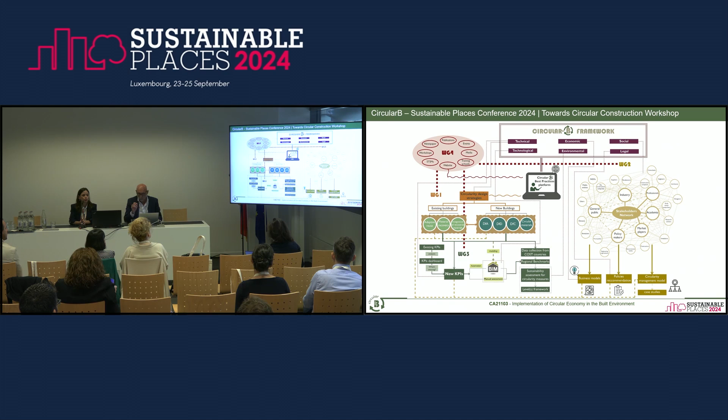And we are structured in 4 working groups: working group 1 about circular strategy and best practice, working group 2 circular value chain and stakeholder engagement, working group 3 on the KPIs framework, and working group 4 dissemination and results communication. So this is our big picture, let's say, how we are structured to have this circular framework.

And now I will tell you what we've been researching about the state-of-the-art on digital tools for circular economy. So it will be more about the concepts of digitalization and how this can drive this process to the circular transition, to the sustainable transition.

So first, what is the main concept about digitalization? I think there is not one only concept, but we can think about the emerging and often interconnected digital technologies that will enable more efficient processes and enhance traditional and new goods and services, products, and business models. So here we can have this broad vision about digitalization.

Also, the digitalization has been driven by these two technological trends, that is digitization and interconnection.

And it's part of the European plan or European future vision because the digital transition can open new opportunities for new business, for trustworthy technology, foster and open a democratic society, enable a vibrant and sustainable economy, fight climate change, and sustainable transition. And we identified the key requirements for these three transitions, towards a green and digital future. We can divide this into 5 main areas: social, technological, environmental, economic, and political.

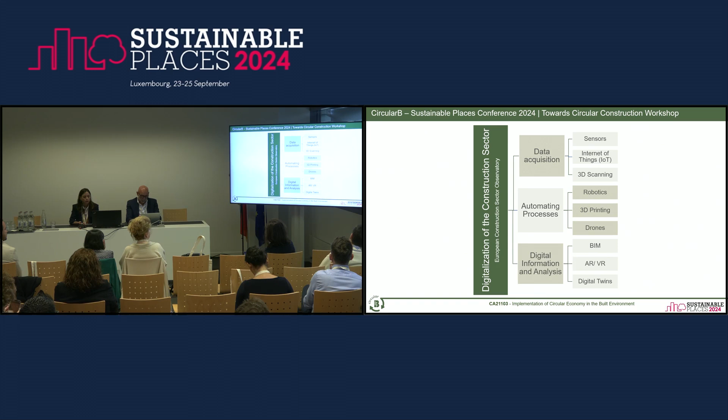They have also been adopted at different levels, or 3 levels of adoption and forms of implementation. The first, the basic one, is just to facilitate communication and reduce travel, like using WhatsApp or video conference. The second is more improvement and automation of the manufacturing process. And the third is the high level of usage of digital tools, such as drones for 3D scanning, 3D printing of prototypes, and testing a solution in the digital environment.

Also, we found that digital technologies have emerged as vital enablers in closing, slowing, and narrowing the materials loop. So they can help this dual transition to sustainability and circularity by analyzing, testing, and making informed decisions.

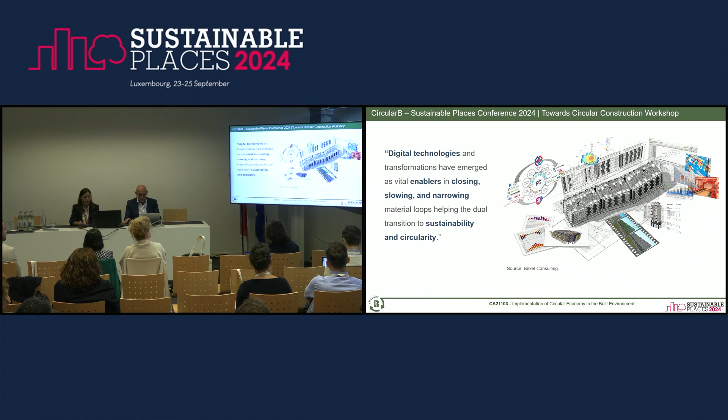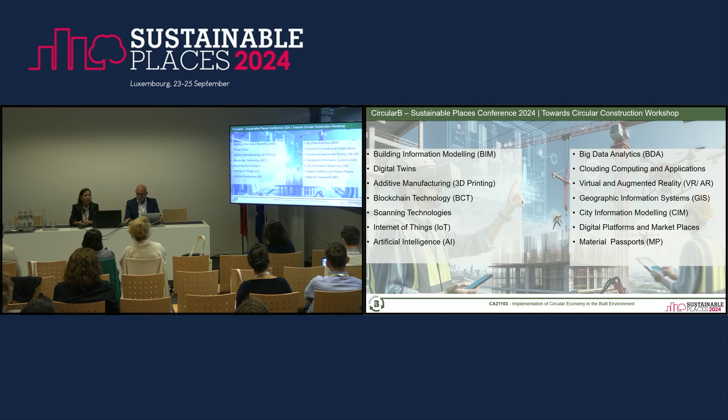We identified 14 main digital technologies that can be used to implement circular economy, or that are the most used to implement circular economy. I'm not going into detail on all the technologies here, but this is just what we found in our research.

Also, there are many benefits identified in the use of digital tools or digitalization in promoting circular economy. We can list some environmental benefits, such as easy access to product and material information through materials passports. I can analyze and test a solution and make decisions using life cycle analysis. I can also have more effective construction and demolition waste management.

Also, under the social benefits, we identified that the use of digital tools can accelerate economic and social progress, making more inclusive and livable places, cities, and neighborhoods. Also, safety and comfort measures, and we can use it to reduce costs and have more affordable houses, a theme that we discussed yesterday.

Also, through the economic benefits, we can use life cycle cost analysis. We can test and evaluate solutions before implementing them. And also, we have opportunities for new business models and circular business models.

Are we okay on the time? Yes? 2 more minutes. Okay.

And last, we have managerial benefits. We can facilitate this interaction. The use of digital technologies or digital tools builds trust in management and also collaboration. So we can also use data management and monitoring of material flows.

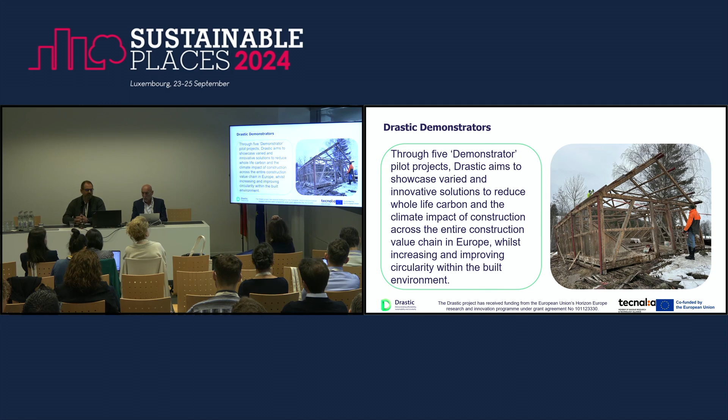We'll not go very deep on that, but at the end, we have different approaches to the same problem. One of the main objectives is to really develop a new understanding of how, for instance, environmental performance is measured. So we are developing a multi-life cycle assessment platform or methodology where we could actually evaluate how the impact of a product that is reused several times during its lifetime can be measured. That's one of the objectives.

And the other one, of course, because we are talking in the era of digitalization, we need to keep track of things, and we need to implement a digital traceability platform. The main objectives for this platform is really to integrate these novel data-driven tools. Some of them are just existing, but some of them are not.

We are making a lot of emphasis on the way we are diagnosing these products. What is the health of the products we are going to reuse? That is some information that has to be kept tracked.

We are working also at building level, for instance, developing tools on the fast diagnosis of thermal efficiency. We are also, for the construction and reclaiming materials, developing automatic identification by artificial intelligence. We have a concept on extended traceability I will show you later, on the involvement of the different actors in the supply chain for the reused materials.

Basically, what we want really to keep track of is the product that we are reclaiming. That's our starting point, and how that's integrated. For that, we have role players like Madaster or Kala to perform all these calculations.

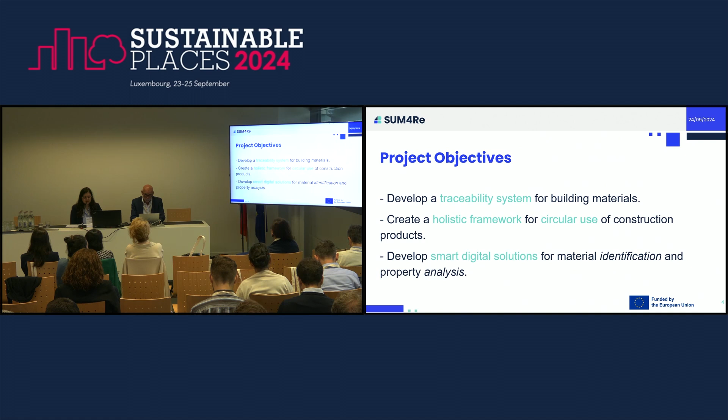Digital solutions and interfaces will be developed to ensure a connection between SUM4Re and platforms developed in previous existing EU projects. This includes software and databases powered by artificial intelligence and blockchain technology, to ensure everything is tracked efficiently.

Our tools will also focus on reducing waste and lowering CO2 emissions, and consider circular economy practices such as reduce, reuse, repair, recycle, and renovate.

Additionally, we'll improve existing tools, for example by enhancing the BIM standards to support the circular economy and make sure everything works well with other systems already in place.

SUM4Re will develop a new circular BIM, a CBIM, that will also be connected to different national construction material databases, including other digital material passports.

So to sum up, the objective of the project is combining urban mining and digital technologies for automated data acquisition and building materials identification. The project is funded by the European Union and includes 17 partners from 9 countries. It started in June 2024, so it's very recent, and it will last 42 months.

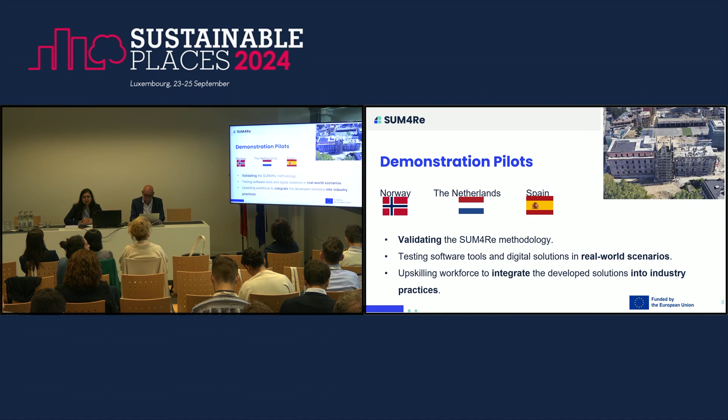In conclusion, SUM4Re aims to support the transition to a circular economy by pioneering new methods for material identification, circularity, and sustainable construction. My question is, because all of our projects will be working on very similar topics, how can we create synergies between them, and how can our projects work together, learn from each other, and perhaps you have ideas of collaborative activities that we could do together. So this is my very large, very vast question.

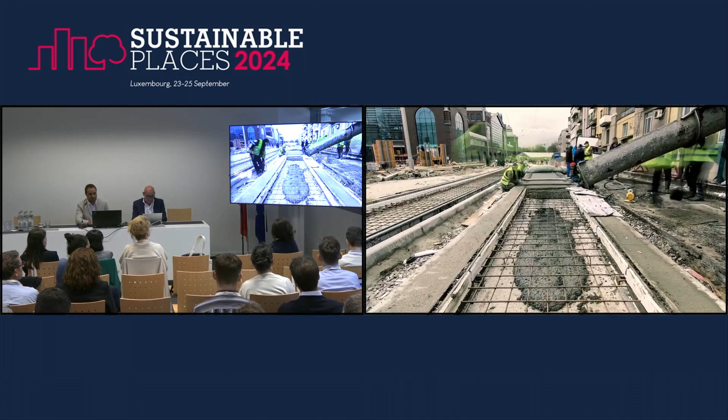These pioneering technologies will shape the future of road and rail networks in Europe. Welcome to a new era of transportation infrastructure, where sustainability and innovation converge for a brighter tomorrow. LIAISON: making transport infrastructure climate neutral, sustainable, and circular.

So as you can see, the project deals with a lot of different solutions, physical and digital. I will present two of the digital solutions that we are now developing. The project started a year ago, and now we are finishing some of the solutions.

The first one is a dynamic multi-infrastructure governance framework. The idea here is that we ask construction companies to adopt new solutions for improving sustainability in civil works. But we don't have a reference for what is sustainable and what is not. So the idea is to implement a complex and advanced methodology to assess the sustainability of the civil work, the transport infrastructure, compared with the business as usual, the standard approach. Here we assess the different dimensions of sustainability.

We assign different weights and scores to the different solutions, and we arrive at a multi-criteria analysis to weight and have a score and rank of the different solutions we are implementing. This is aimed at design companies, construction companies, and administrations, so that in the tendering process they have an overview of what is sustainable and what is not, in order to select the most sustainable works. And the other tool is a BIM-based tool for enhancing circular economy at the end of life of the project.

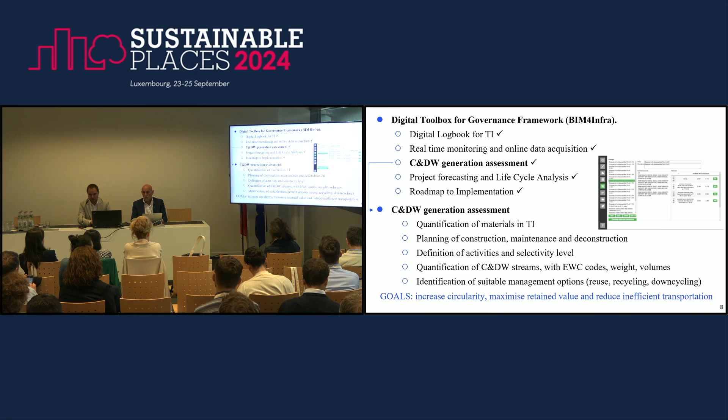We are able to plan the decommissioning and the valorization of the different waste. The idea is to implement a layer of traceability with blockchain technologies and other technologies, in order to track the materials from demolition to the valorization plant, and after that, the inclusion of the valorized waste in new products.

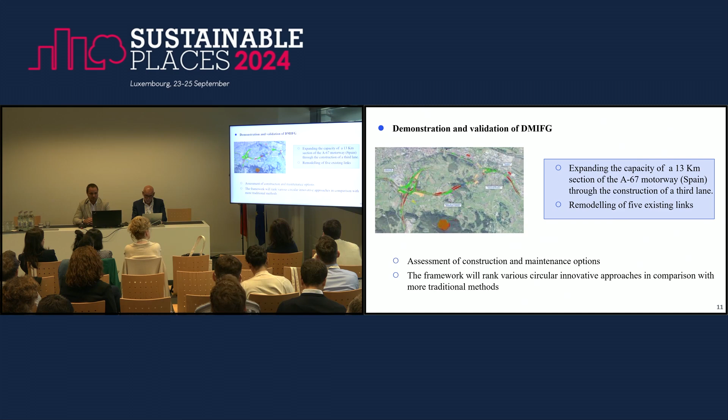Now we are finishing the different tools, and the idea is to demonstrate them in a real demonstration project. Here the idea is to assess different maintenance options during the expansion of a motorway in the north of Spain. We are helping the administration tender the maintenance works of this motorway.

And that's all from my side. Thank you so much.

I'd like to thank you twice for the presentation and a very nice movie. Sama, please continue.

Perfect. So, good morning, everyone. It's actually really nice to see that the room is full, and maybe I can do some dissemination on behalf of R2M, if I may. So I heard that this year they had the highest in-person registration, and I can see already that the room is full, so that's really nice. My name is Sama, I'm from Demo Consultants, sitting next to the director of the company.

And I'm happy that today I'm presenting the REINCARNATE project on behalf of the whole consortium, sharing with you some of the recent results that we have in the project.

I'm not going too much into details introducing the project, but just in a nutshell, reincarnation of the construction products and materials to extend their lifetime and basically bring them back to life is the concept of the project, and hence, in short, we call it REINCARNATE.

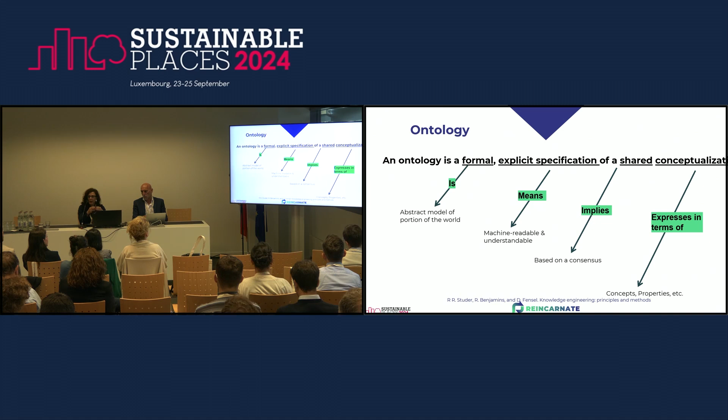What is the ontology for circular economy? What does it mean? Basically, the ontology is a formal, explicit specification of a shared conceptualization. So in a nutshell, there are terms, there are concepts, but it's not very clear between different stakeholders, and the whole purpose is to define that and define explicit connections between them and the relations between them.

So what we did in this project at the beginning, we tried to identify the key notions. How did we do that? We came up with structured templates, we did workshops, and we are now in the process of writing a paper about this, because then we can propose that as a generic and general methodology, so it can be implemented in other projects. But what we tried was that we had a diversity of different stakeholders in the project. So through these templates, we try to understand what is the key notion. For example, as a contractor, I find this important because I want to achieve this, to create this and that.

Once we did that, interestingly enough, we found out that there are some common entities, some common concepts within all these descriptions that we found from the different stakeholders. So there are always actors involved. There is product component, there is energy, there is value, there is information and process. But so far I haven't described the relation between them. What we understood is that when we talk about circularity, it's basically a process in which different actors are trying to create value. And that value could be economic, could be social, right? So that's something you can also define under value.

As you can see here, you define the relations between different concepts. So a process involves actors, and then a process has properties - it has cost, it has environmental impact, it gets an input, maybe it's a product, or maybe a component, and then it creates another product, right?

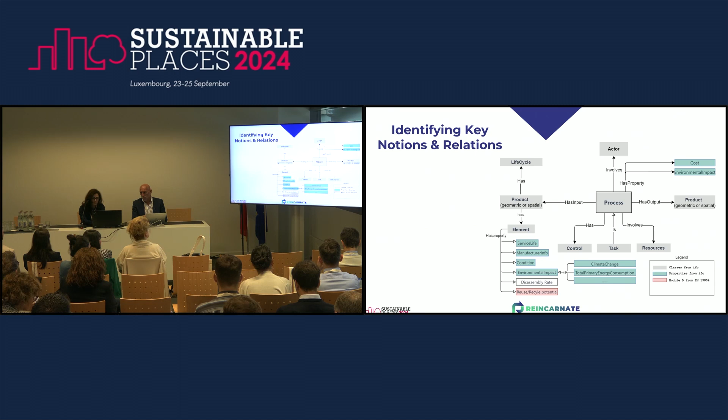And the product has a life cycle, the product has elements, et cetera. So you can go deeper and deeper in this description. And as I said, I don't want to only talk about theories. I want to show how we did this in practice.

We have so far implemented this methodology for two use cases: upcycling flat glass, meaning you use flat glass in the next life cycle as flat glass again, which is more valuable than downcycling it to bottles, for example. The other use case is the digital delivery ticket. Since I had limited time, I only focus on one, but if you're interested I can explain the other one later.

So what we did, as one of the results of the workshop, we tried to understand the process: what are the steps involved, what are the different actors involved. In very abstract terms, you have a window in the facade, then it's dismantled, then it goes to the crushing center, then it's called cullet when crushed, then it goes to the optical sorter, and then flat glass is manufactured again and put back in the building. That's the big picture, and for each step we have process, actor, input, and output.

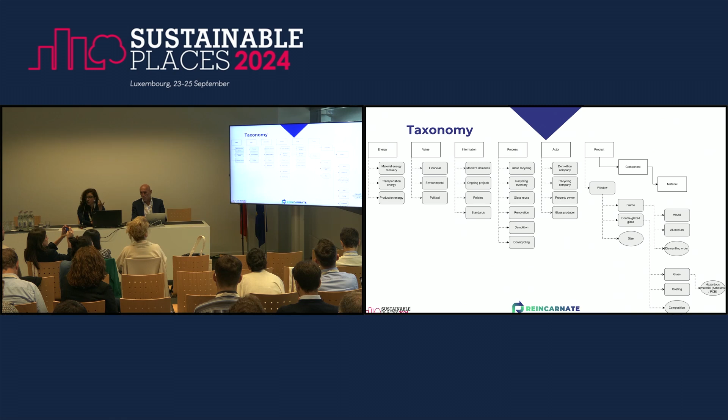Basically the data flow. Then we started to define the taxonomy based on the notions we identified earlier. For this specific use case: what are the processes, what information is required, what kind of value does it generate, what are the products, what does it get as input, and what does it produce as output?

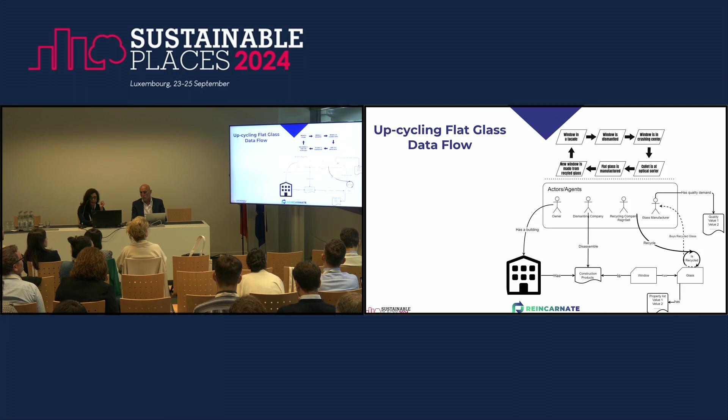Then we tried to go deeper into the actors and see how they relate to each other. We started to sketch that in the CPIM, the Circular Potential Information Model platform: who are the actors involved in this case, what do they need from the platform, what are the products, what are the processes I explained earlier, and what are the tasks?

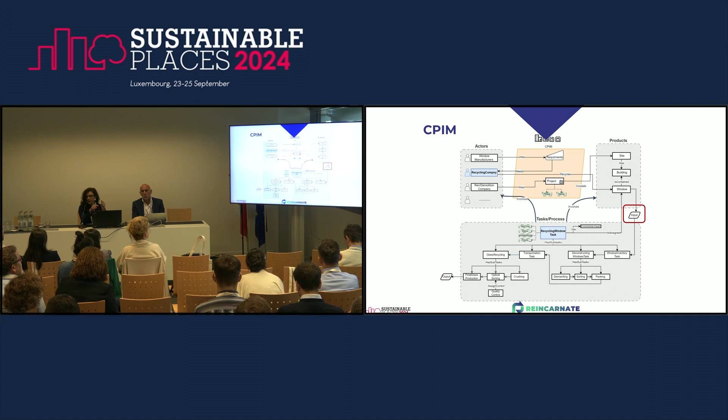When we drew this scheme together with experts in this field who are part of the project, we identified that getting input from the window is actually one of the bottlenecks. This is very important, because every process requires a different batch of that data.

So coming back to the ontology, we looked at existing ontologies and didn't want to reinvent the wheel. You all know IFC is already a very recognized data format, de facto the data format and data model used in the construction industry. We thought it was good to utilize that rather than invent something new, and if we recognize something is missing, we can propose it.

So this is an example where a building has elements, window being one of those elements, and window has different entities. This is how it's basically modeled in IFC.

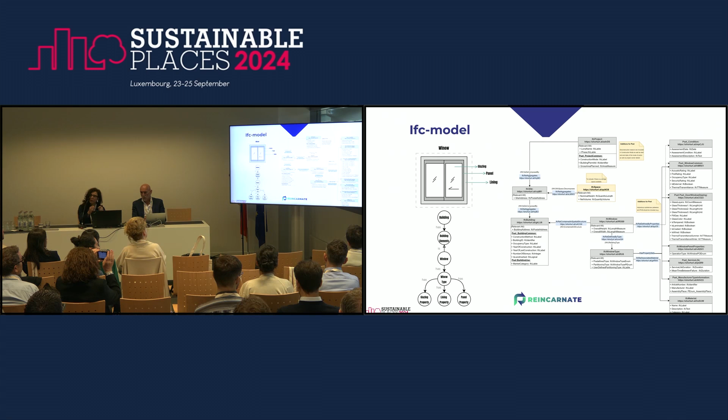So together with this expert, we went through all the common properties already identified in IFC, and they told us what's actually important for them, what they need. We highlighted all those parameters, and together with them, highlighted the missing parts. That's where we came up with suggestions and recommendations, which I think could be interesting for buildingSMART, since they could include it in the next round of development.

So for example, we propose three new properties here. We define the type, we define the data type, with a description of why they are important, and we also propose how they can be integrated.

Then going back to the scheme I showed earlier, I said we need ontology, but we also need logic, so we need rules of inference. Now we have this IFC file with data stored in it, so what do we do with it? We started to brainstorm with these experts and got insight into how they actually make their decision-making processes, and then we defined a few rules. A simple one: if there is wired glass, then it has to go to landfill.

If there is a film on the glass, and if the thickness is less than this, then it can go to recycling, and if it is laminated, it should go to downcycling. So basically, these are some decision-making processes that they have, and we have identified for each decision process what is the kind of data that they require.

So here it comes to the computation part, as I said, so how to implement it, how to make it machine-readable, and actually how to use it. What you see here is a screenshot from the CPIM platform, which is based on RE-Suite platform, which is our own product, developed in-house, and MainFlux product, which covers the IoT part.

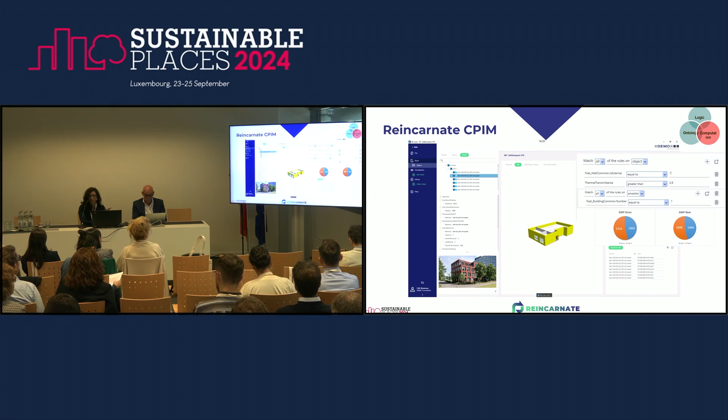And of course, you can also scale this up and imagine that then you can do it with several buildings. So basically you can quickly understand what is the total volume or square meter of the potentials that you have within this neighborhood, for example.

I think I'm almost reaching the end. So this is the end of the presentation, but as I said, we did the same process for digital delivery ticket, and that one is mainly about enriching the IFC file with this QR code that you can scan. What we have done is enrich the IFC file with the data that we get from the QR code. I'm happy to talk about it later on if you're interested.

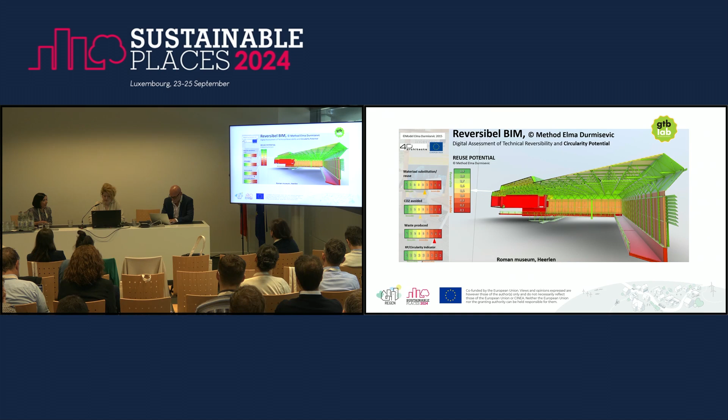Now, this reversible BIM is part of a bigger reversible building design toolkit, which has been validated during the Buildings as Material Banks project, a Horizon project, ended in 2019, where basically I developed a whole toolkit which was based on the project and my PhD from Delft, end of last century and beginning of this century, which was dealing with design for disassembly, and ended up in a number of European projects.

The Buildings as Material Banks project, a Horizon project, was one of the first ones where we tried to define the framework for circular buildings in Europe. This toolkit tried to understand better what a circular building would be, where we developed two key parameters for how to assess circularity of a building.

One is the technical reversibility of a building, that's the reuse potential of materials, what can we do with them, and the other is spatial reversibility of a building, which has to do with adaptive reuse, what kind of different aspects and functionalities buildings could have in order to reuse them again.

Together, there are design guidelines to support designers to design such buildings, but also assessment tools like reversible BIM and the transformation capacity. I will not be talking about that one.

Much of this is integrated in a number of ISO standards and things you've seen in the past, and circular economy principles published by the European Commission, where the principles that I will shortly be talking about, built into reversible BIM, are integrated at various levels and so forth.

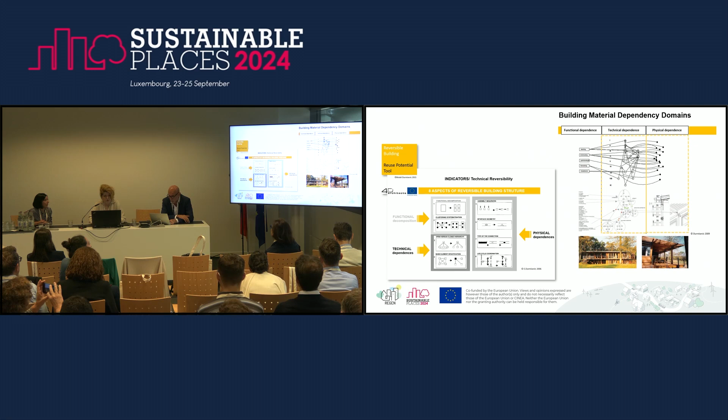The functional decomposition, just to go through some of them: the modularity of prefabrication level, whether there is a base element or intermediary between the parts or not, the hierarchical structure and hierarchy of the configuration, how easy it is to reach something through the assembly or disassembly process, the geometry of connection, the type of connection, life cycle coordination, just to name some of them. In the end, there are 8 indicators and 17 sub-indicators.

These tell us how easy we can take a material out of the building, what level of damage the material will sustain, and what the potential reuse option for that material would be.

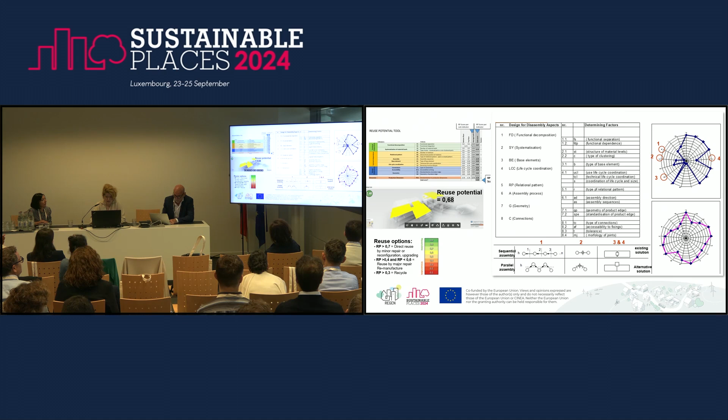The reuse potential then becomes a kind of number from 0.1 to 0.9, reflecting reuse options which are color-coded, as I showed in the first slide. These reuse options basically address...

The size of the feedback loop of the material when recovering it. The shorter the feedback loop, the better, or the lower the environmental impact there will be, and a lower economic impact too.

So what these loops represent here is all possible options of taking material back into, or making a new material out of, the existing one.

If we recycle concrete, then we go into a very big loop, going to this red part where we have to crush the concrete. That means there's a lot of transportation from the construction site to the facility where the recycling takes place. We have to create a new product and go through all production processes in order to create a new material. So that's a very big feedback loop.

A very short, green feedback loop would be if we took a frame out of the building, repaired it — say a steel beam, made some repair — and brought it back into the new construction. So that's a small, short feedback loop.

How we identify which feedback loop we are dealing with is based on the 8 indicators and 17 sub-indicators I was mentioning. Of course, all these indicators and sub-indicators are published many times, and I'm sure you can find them in articles or on the website.

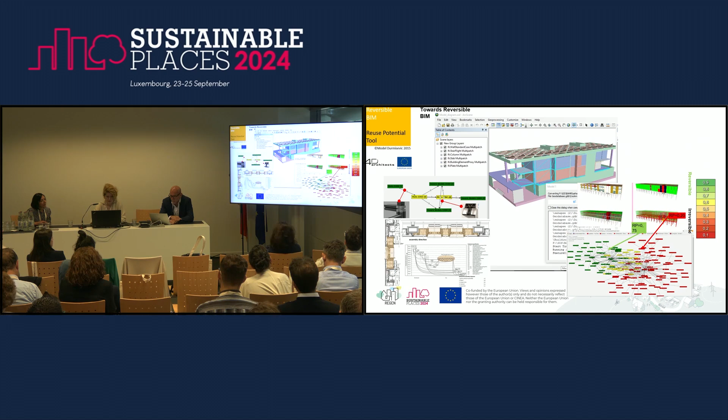Now I go to the pilot that we are working on in the region, and Anna is going to show what we've done further on with these data.

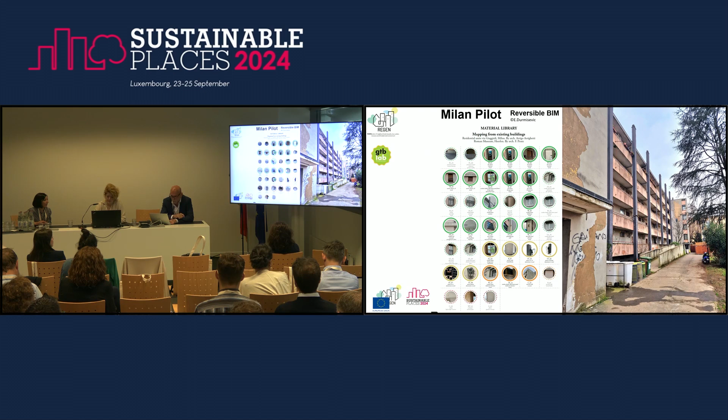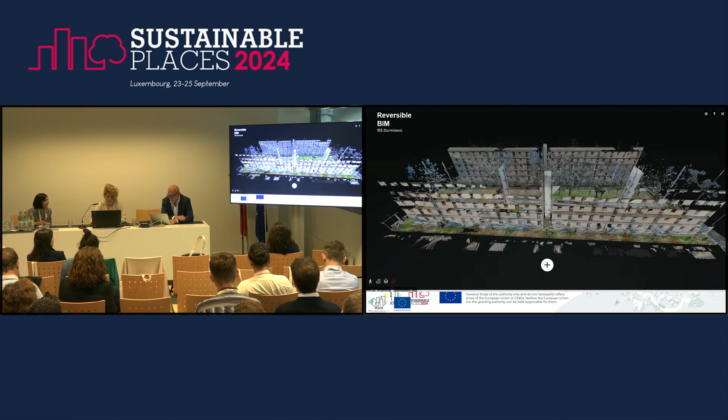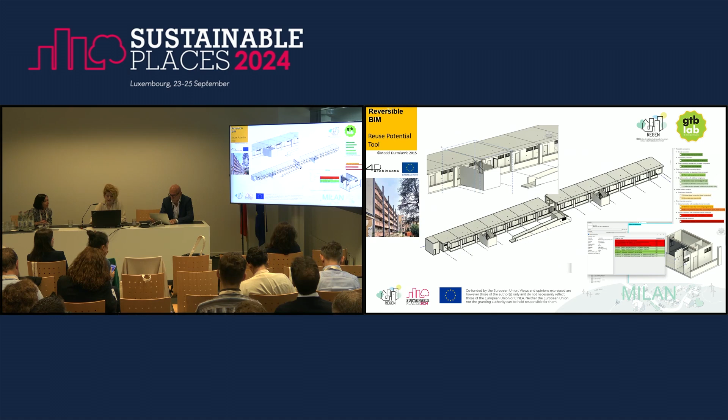So we have a neighborhood in Milan, a couple of housing blocks which need to be demolished. We've done first some manual analysis of the block itself. Then the scanning of the building has been done, the 3D scanning. And after that, and getting some technical information from the city of Milan, the BIM model has been built with the materials assigned, the connections between materials identified, and the analysis of all relations between materials in this model are automatically calculated.

This is an analysis of one apartment in this block, which has 124 elements, so many relations between the elements, and these 7 disassembly procedures.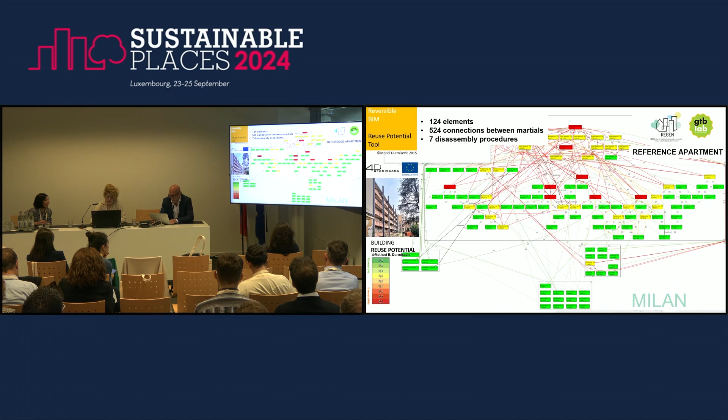This is very small, those are very small letters, I'm sure you can't read them, but this is just an overview of data that comes out of a BIM, telling us something about the function of material, the volume of materials, the embodied CO2, but also avoided CO2, which is related to the reuse potential score. Also the tonnages, that material, embodied tonnage of material, and reuse, potentially reused tonnages, again related to the material, to the reuse potential score. There's also an overview of all materials and the connections.

As you will see, this material has 3 connections and the type of connections. So for the deconstruction companies to understand better how they can reach material, what kind of connections are assigned, and how they can plan the deconstruction and recovery of the materials themselves.

In the end, there is also a high-level understanding of what the capacity and circularity capacity of the Milan apartment is. And in this case, this is a building from the 70s, which on the tonnage side and material side would have 3% of materials to be reused, and 97 to 98% of materials are going down to recycling.

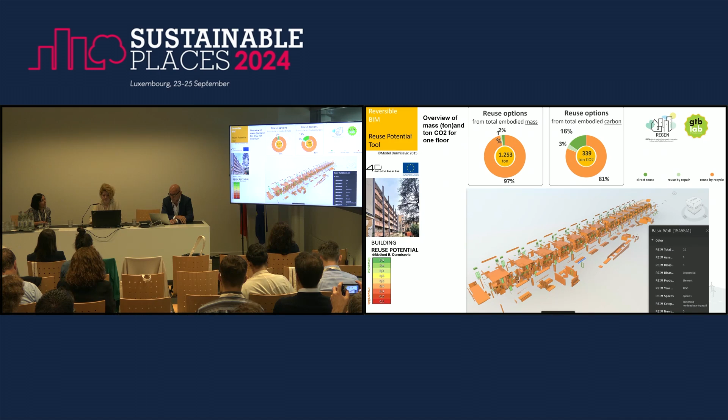And on the whole floor level, we looked also into CO2, where 16% of materials in this building have potential to be directly reused, and this 16% of CO2 can be reused, and 3% can be reused by reparation.

There are some number of projects that we've done also through different European projects using this model. There's also a circularity profile, which tells us about the circularity profile of a building when looking into reuse potential of buildings. And obviously this one in Milan would end up in a low circularity profile because only 3% of materials could be reused.

We also suggested potential look into innovative deconstruction technologies, and this is an example of a construction project in south of the Netherlands, where we have cut concrete parts of a housing block from the 70s into 3D units and built new houses out of these concrete cores. And if this innovative cutting technology would be used, then this building would end up in a higher circularity profile.

This is where we are now, and we are talking with Milan at this moment in order to understand better whether they would be able to maybe do some innovative deconstruction techniques or do something more than just crushing concrete down into pieces and ending up in a circularity profile of 0.

So I'll give the floor now to Annie.

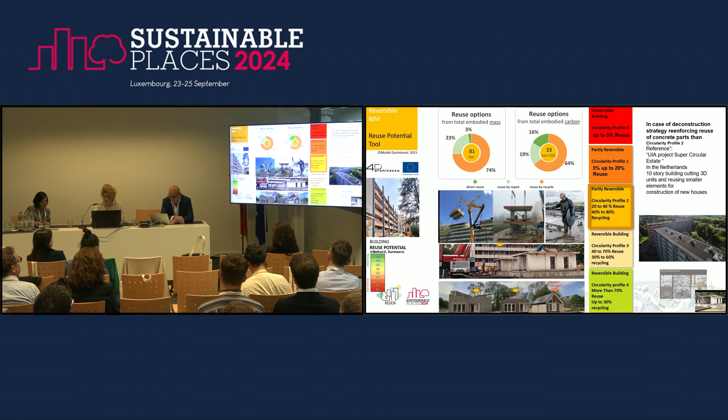So we will continue now, as we know very well everything about the reversible BIM model. We can continue with the DDC platform because this is the next step in the ReGen project. This platform, which is called DDC, it's the result of another project, which was the Interreg Northwest Europe project, Digital Deconstruction, which ended last year in September. So what's this platform?

Okay, so this platform is composed of 4 technical modules. First we have a 3D scan of the building. Then we have the reversible BIM technology. Then based on the BIM, we can extract information regarding the materials inventory. And Block Materials, which was a partner of the previous project, was responsible for creating a material passport based on the blockchain technology. And then at LIST we were responsible to create a connection between the information we collected from these different technical modules.

The idea was to create a decision support interface for deconstruction and reuse strategy, combining different kinds of visualization. So we had visualization regarding BIM, indicators, economic and sustainable indicators, materials data, materials passport. And also the idea was to support the scenario analysis regarding the reuse strategy.

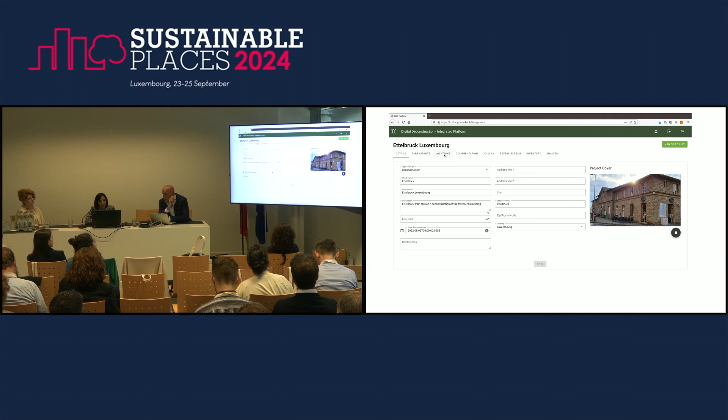Well, so this is a short video of the platform. Is it working? It seems so. We can see that here we have the detailed information regarding the building. We can have the location of the building, information regarding the documentation.

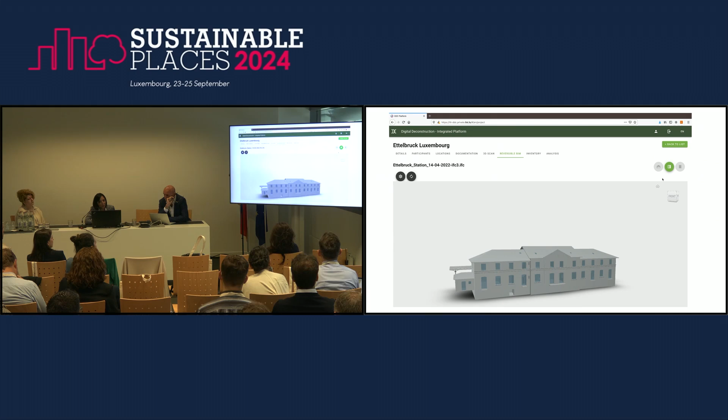Then we have access to the 3D scan, which is also very important to have information regarding the context of the building component that we plan to reuse in other designs. Then we have the BIM, and we have this inventory which is created directly from the BIM model.

Each line in the materials inventory gives us direct access to the building information modeling, but also we have information regarding reuse potential. Here it's green, meaning we have a high reuse potential. Then we have detailed information regarding this material or component.

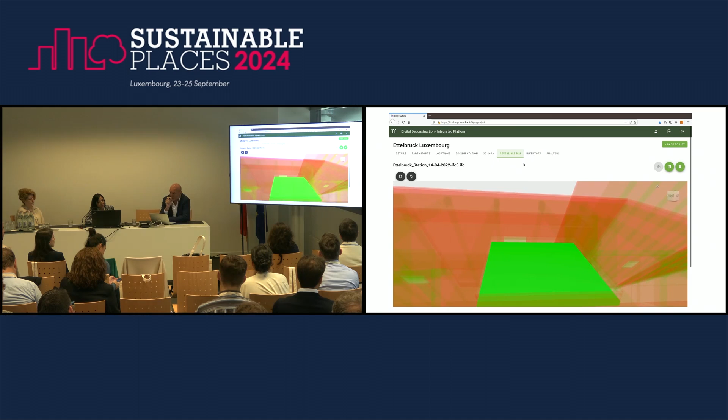The idea is also to use filters to encourage people to understand the reuse potential, but also to define a reuse strategy. So we can create filters and combine them to get good visualization to support the collective process regarding this reuse strategy. So this is the result of the filtering.

And then we have this dashboard which summarizes the data regarding the composition of the building and also the reuse strategy.

In the ReGen project, the plan is to use this DDC platform, but as you have seen, we are at the level of the building. The idea is to combine this data collection regarding the building and extrapolate the data to have it at the urban scale, combining GIS systems, BIM, material cadastre information, and materials availability. The idea is, in the end, to provide support to match supply and demand, and to increase the reuse of materials coming from construction.

For the case study, we have sites in Beckerich and also in Milan, but for this demo we will focus on Beckerich, a very small town here in Luxembourg. The idea is to use also the MUST system, which is dedicated to citizens' engagement, and which uses geospatial data for visualization.

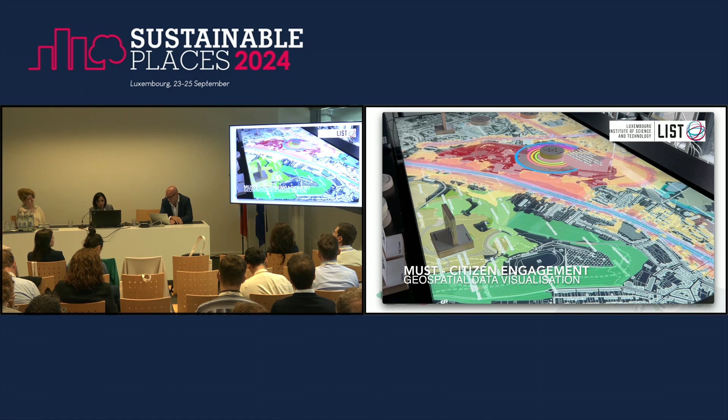So we have a demo, and I encourage you to go to the booth to get more information regarding this MUST application. Considering the case study in Beckerich, we have the Beckerich demo.

The idea is to have this table in a neighborhood regeneration office, adding a lot of information regarding the digital twin and urban mining. We combine 3D scan inventories and BIM modeling, then identify building typologies to have this information at the level of the city, and encourage citizens to create scenarios regarding circularity.

So what we have at the moment - the project started this year in January, so we are just at the beginning regarding the prototype - but we have this map server with a lot of layers of information. We have information regarding the construction date of the building, the cadastres, and we started with simulated information and data regarding the materials composing the building.

So let's see the short video if it works. Yeah, it works. So here is the table.

So we have this token, which we use to zoom in on the map, and then we can actually place a token. You can see different information, different layers. Here we have information regarding concrete, slate, wood, steel. When we place the token, we have this visualization regarding the building we previously selected.